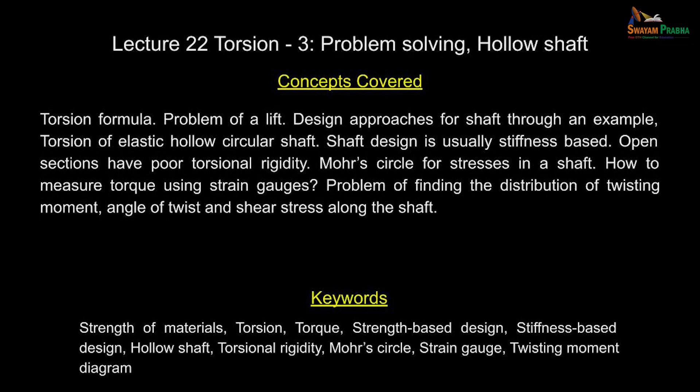Let us continue our discussion on torsion, and we shall solve some interesting problems today to get the idea of how to use the equations that are developed, and what are their limitations.

Now this is a very interesting practical problem. You have a lift system, you have a lift, there is also a counterweight. Periodically they will come and maintain the lift, and at that time it is possible for you to see what is the counterweight in the lift system. This is in an apartment. Those lifts are much smaller than what you have in our institute, or when you go to hospitals, they have a huge lift.

The question here is, if you get onto any one of these lifts, there will be a board that says how many persons can enter into the lift, and you have an electrical system. If the persons are more, it gives a buzzer, one person has to get out only, then the lift moves.

So at the design office, the person has to decide how the system stiffness is so that it meets all the requirements. Here the requirement is, when the lift is standing at one floor, that means everything is static, you can permit only a downward movement of 3 millimeters. So at the design office you have to find out what is the stiffness. Is there anything that you have to do with shaft design? All this you have to take care of, and based on this the designer also has to decide how many people can enter into the lift.

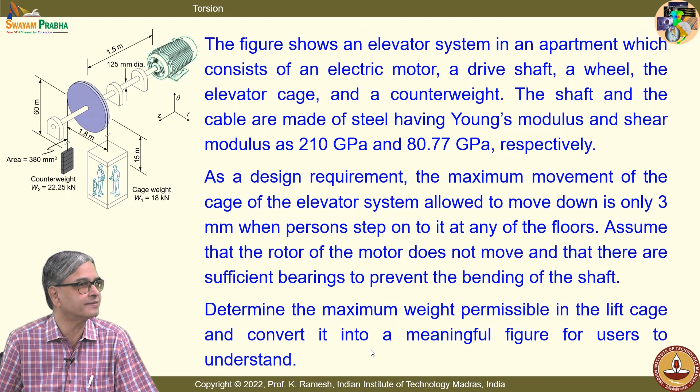So you have to have a pragmatic approach and then bring in some kind of factor of safety, and you have to do that.

One of the simple things that you can do first is look at the free body diagram of the cage, and you can also have the free body diagram of the counterweight. So what you have is a dead weight of the cage, that is put as W1.

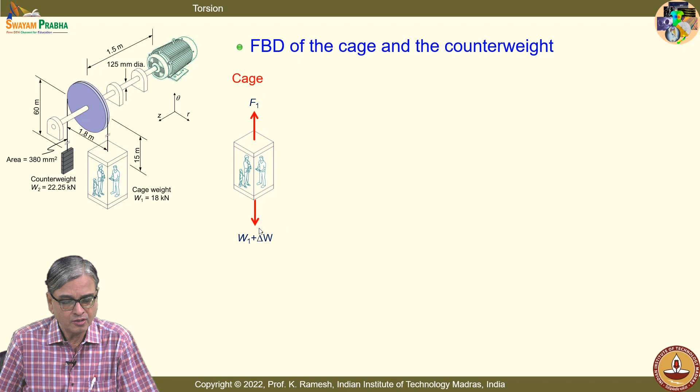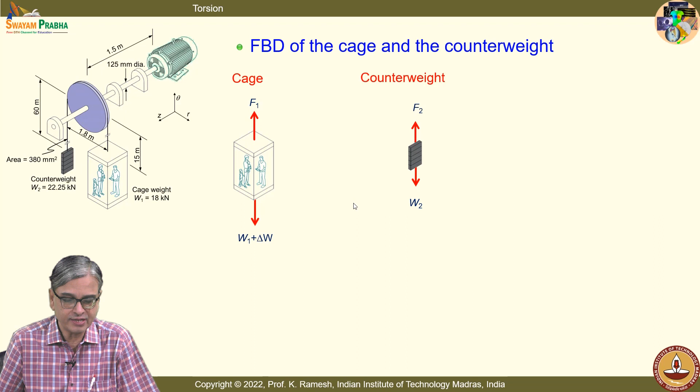Let us imagine that the lift was empty to start with, and some people have entered into this lift, that is delta W, or in other words, how many people it can accommodate is the question. So you have to put a label inside the lift, so many people can enter into the lift. This free body is simple, and you get the force balance as F1 equal to W1 plus delta W.

You are given the cage weight is 18 kilonewtons, and you have the counterweight as 22.25 kilonewtons. Now the question is...

What all aspects of the system will contribute to a downward movement of the cage? You must understand that the motor stopped, there is no rotation from the motor. So it is standing at a floor and people step into it.

And you know very well that we are discussing torsion, so something with torsion is going to happen, so that you will recognize. Because many times, when you solve a problem, if it is given in a particular chapter, you take advantage of that. In reality, if you are given a physical problem, you should know how to dissect and find out what contributes to it. Is the idea clear?

So what is the contribution from torque? Can you imagine? I have a shaft. This shaft is supported at 2 bearings on one side and 1 bearing on the other side, and you have a big pulley which is mounted on the shaft. You have a counterweight and you have the lift cage. So you can imagine, you are also given the length, this is about 1.5 meters.

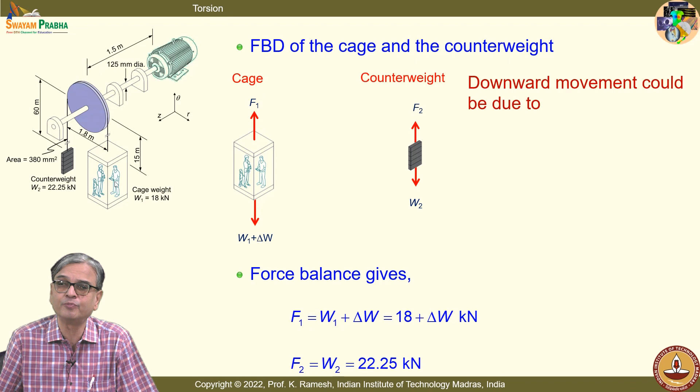So you are going to have this shaft. It is not a rigid body, it is deformable, so it develops a twist. Because of the cage weight there is a twist already, and because of some people entering into the lift there is a change in weight, change in torque, that contributes to angle of twist, which will get magnified by this big wheel, and you will see this as a vertical downward movement of the lift. So that is very clear. Angular twist of the shaft is very clear, that you can employ the equations and then find out what it is. What are the other aspects that can contribute to downward movement?

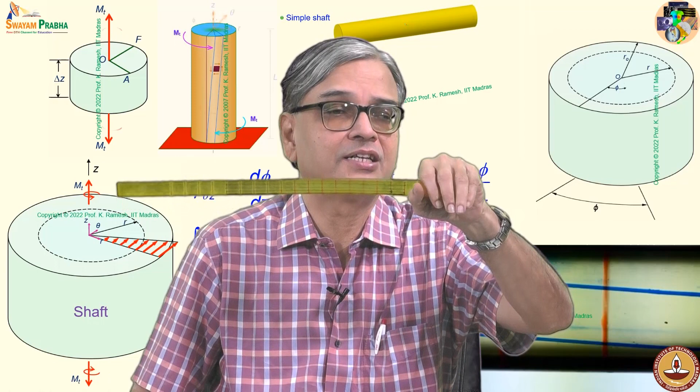Can you guess what are the other movements that can contribute? See, I am holding it on one side, what you find is it's sagging. So I put a support, I put one support, the sagging is very much limited.

And what is given in the problem? The problem says that I have 3 bearings, 1, 2 and 3. They are sufficiently close enough so that any deflection due to bending, you can ignore it. That is given in the problem.

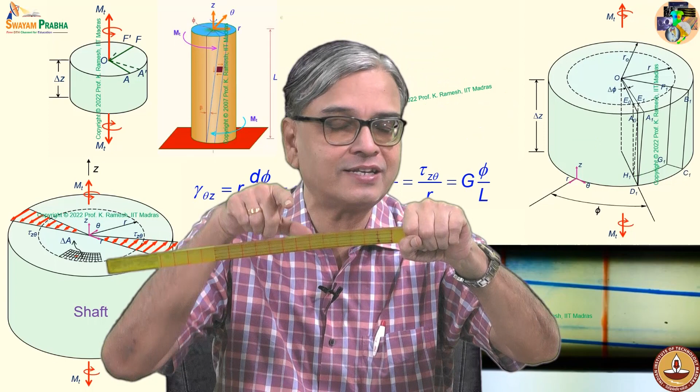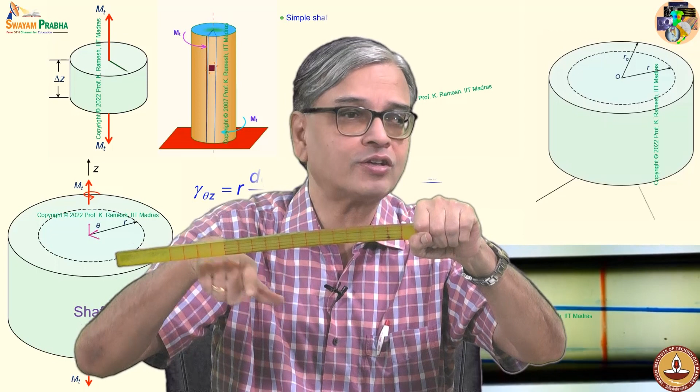There are 2 ways of looking at it. You don't have a background on bending, so you cannot calculate the deflection due to bending. When I put a support, the shaft remains horizontal, that's fine. But if I have an additional load which is very heavy, this is going to cause a deflection. You don't have that background. So for the time being, let us ignore, as given in the problem statement, the bending of the shaft, though it can contribute to vertical deflection, let us ignore it for this problem.

Is there anything else that can contribute to downward movement? Stretching of the wire, that's very good. I have a cable on this, so I have a stretch of this. That you may miss it.

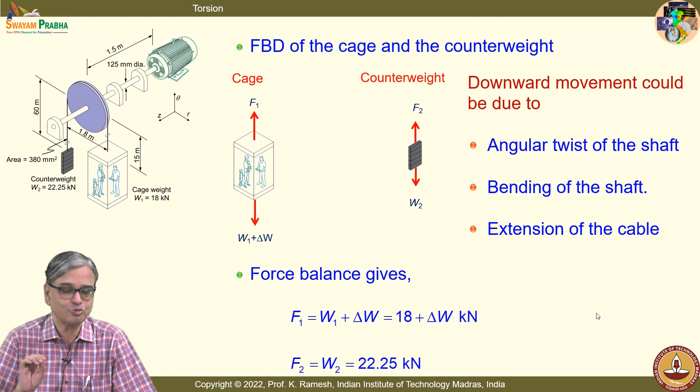Fine, so you also have extension of the cable. So we have to account in this problem only 2 aspects: angular twist of the shaft and extension of the cable. Once you have understood what is to be done, the rest of the problem is application of what you have learnt earlier. Simple and straightforward. Is the idea clear? I would like you to use your calculators and get me the numbers.

So increase of torque due to weight of people: I have delta W into radius of the pulley, and that's also given, you are given diameter as 1.8 meters. So I get this number here.

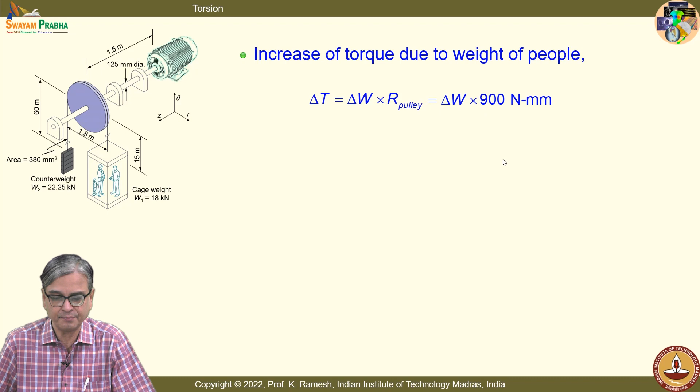And what is the increment in the angle of twist? I have delta T L by G IP, and you know what is the IP for a circular shaft. So I get this as pi by 32 into 125 power 4, and your G is given in the problem statement as 80.77 into 10 power 3. And I have delta W into 900 as the torque additionally developed, and the length is also expressed in millimeters. So I am in a position to get delta phi when I see from this, this is as a fixed end, and then it comes to this portion.

So I have extension due to torque increment. I will have to multiply this angle of twist by the radius of the pulley. So it gets magnified because of the diameter of the pulley. We have taken the radius, from the diameter get the radius, and you get the extension or downward movement due to torque as 0.627 into 10 power minus 3 delta W millimeter.

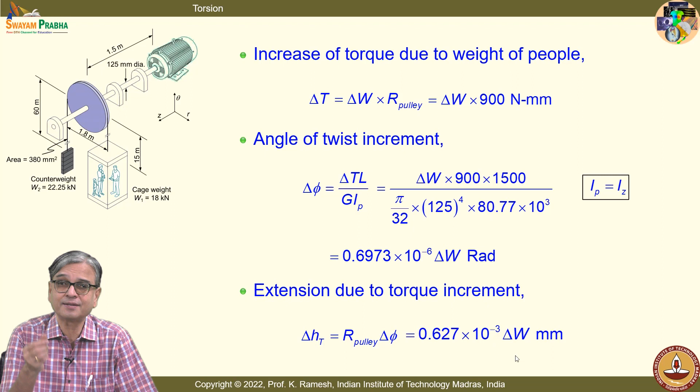We still do not know what is delta W. A problem becomes a design problem when limits are given to you. This is a design problem because limits are given. You are given that the maximum downward movement permitted is only 3 millimeters. How you arrive at it, that is a big question. It's not like somebody has a dream and then says 3 millimeter. There are physical considerations, so you have to look at that, that is a difficult aspect of it, how to set limits for you to do the design.

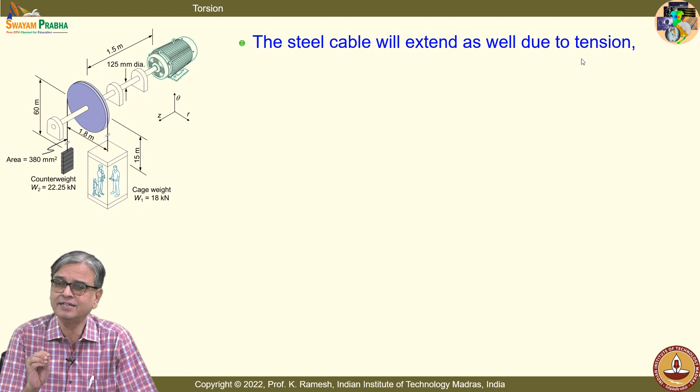And a steel cable will extend as well due to tension. And you know, for axial load, a very famous expression we have got. Do you remember? In terms of applied load P, the extension is given as, these are all very famous expressions you should remember, PL by AE. Don't forget that. Now replace what is P, what is L, what is area of cross section, and what is Young's modulus. We are talking about delta W as the additional load because of number of people who step into the lift, so this is P, so PL by AE.

So I have this number substituted. I have this area of cross section of the cable, the dimensions are given, so you have to look at that. Area is given as 380 millimeters squared. You do not have to do the calculation yourself, it is given in the problem statement, and Young's modulus is given. So this gives me, when I substitute the numbers, I get this as 0.188 into 10 power minus 3 delta W. And it is given in the problem statement that this extension should be limited to 3 millimeters.

So you can easily find out what is the delta W acceptable. It's child's play, just substitute these numbers and equate it, and when you get the delta W, it comes to be something like 3678.36 newtons. See, engineers look at things from a physical perspective. So this amounts to how many people?

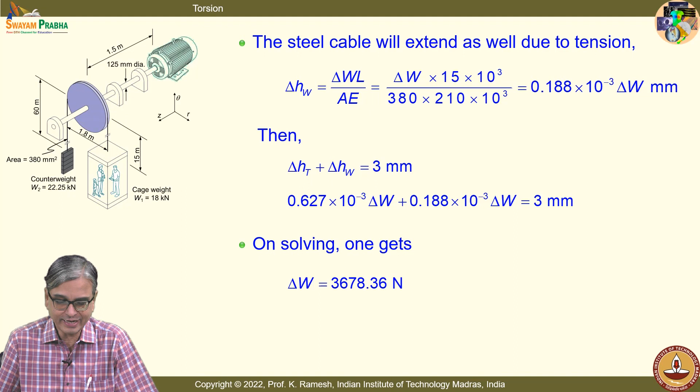Suppose you have 70 to 75 as the weight of the person, you can imagine it can accommodate about 5 people. You are a designer, you want to have some kind of factor of safety inbuilt. So even though I can allow 5 people to step on it, in a conservative design, permit only 4 persons.

So put a label: this lift, beyond 4 persons, do not get onto it. This is one way of learning. While you design, you take care of anything that you have not calculated or included, any manufacturing defect, any problem in the cable, all that you inbuilt by bringing some kind of factor of safety.

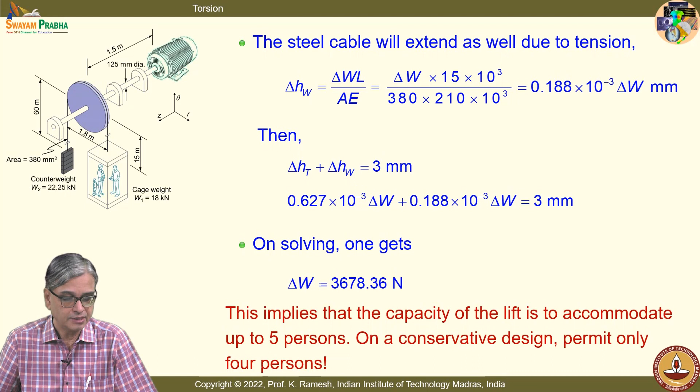See, the cable, what you have here is not a simple rod of wire. You will have multiple strands twisted, and factor of safety for a cable design is altogether different. You will have factor of safety of the order of 10, because any small problem there can be disastrous.

That is what is needed when you have a cable car, not in the lift, but in the cable car you have exposure to natural elements and also high wind. You must have seen in the papers that people got stuck in a cable car and the army helicopter goes and rescues them, all that happens.

So factor of safety is a very, very important concept. You have to apply it depending on the context. For a car design, it was initially 4, now they have brought it down to very close to 2 or less than 2. But when you go for a cable design, the factor of safety is very high, a factor of 10.

When you are designing a nuclear power plant, factor of safety will be very high. You do not want to take chances, because nuclear radiation deteriorates the material. So there are many considerations that go into it.

So a problem becomes a problem of design when limits are set. How to select the limits? That is a very big job to be done. Once you set the limits, you know how to use the equations and get the calculations.

Now we move on to the next simple but interesting problem. Consider a steel shaft - I have deliberately taken simple problems. The focus is to learn the use of equations and also appreciate what happens when I do a design from one perspective. Here the shaft can withstand a maximum stress of 60 MPa. There is also another requirement that the maximum angular twist permitted is only 1.25 degrees. The question is, evaluate the shaft diameter based on strength and based on stiffness.

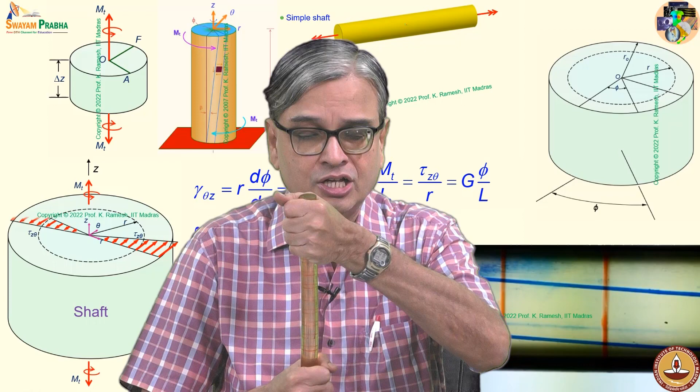See, what I want to do is, while you solve this problem, let me also circulate this so that you can have a feel of what happens in the case of a shaft. You twist it yourself and then see what happens. Can you correct it and then let this be circulated?

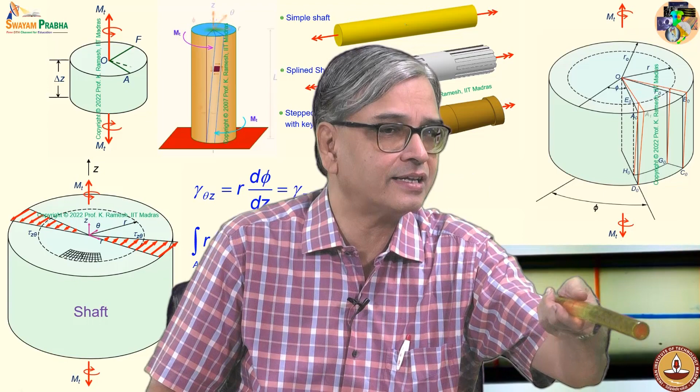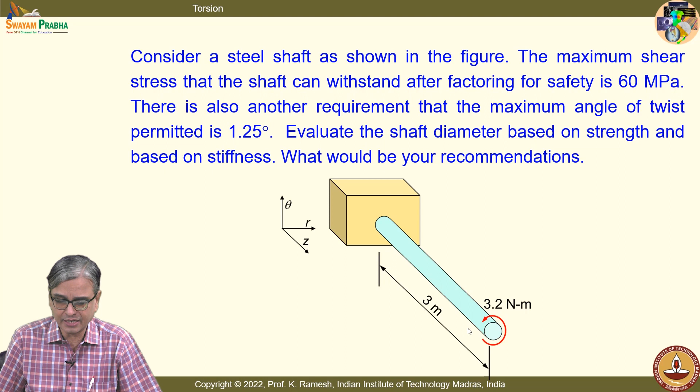So the problem is simple, straightforward. There are no steps in the shaft. It's a simple cylindrical member, and the twisting moment is given.

And you should also understand, we have taken the axis of the shaft as the z direction because it is a circular shaft. We have taken polar coordinates to define the circular boundary, and you should appreciate that the twisting moment is nothing but Mz, and the moment of inertia we want to calculate is actually the polar moment of inertia, because when you go to bending, there you will again see Iz, but that will be a different moment of inertia. In order to avoid confusion, I thought we would adopt this symbolism.

So I have this maximum shear stress introduced from our torsion formula. You can have this as Mt R divided by Ip, and the stresses are maximum at the outer diameter, so R max is d by 2, and Ip is pi d power 4 divided by 32. So the shear stress maximum in a cylindrical shaft is 16 Mt by pi d cube.

In fact, this expression is also worth remembering when you go for design calculations, design of a circular shaft, because when you have a shaft, it is subjected to torsion, it is subjected to bending, it can also have axial force. So once you learn bending, you must also get the stresses because of bending.

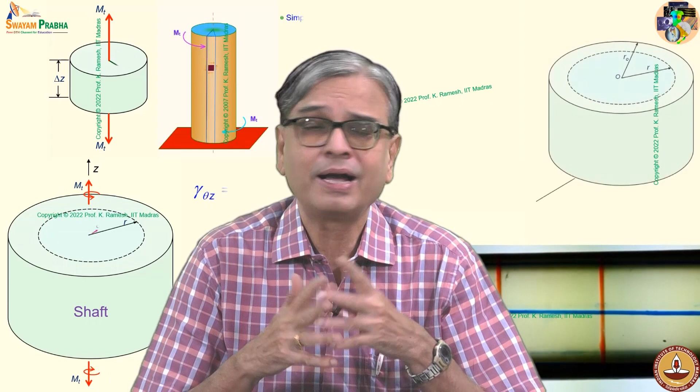And it is given the maximum shear stress is 60 MPa. I would like you to appreciate, you have looked at mild steel, the yield strength was something like 240 MPa. And I said that you will never go to yielding in a real life structure, you will work much below that. So I work half of it, that is 120 MPa.

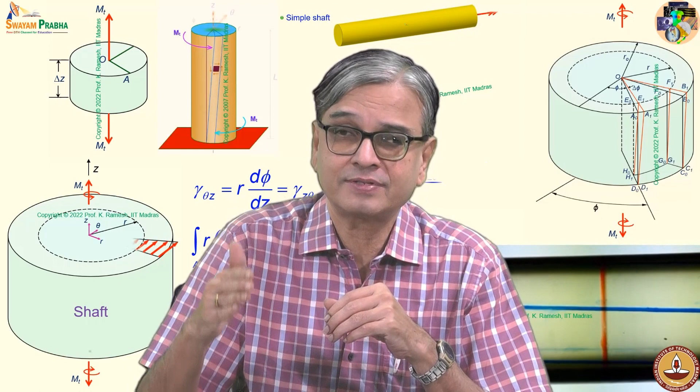Then I said that you have repeated loading. In the case of a problem which I have shown, there is no torsional oscillation. On the other hand, if you go to an IC engine, you also have torsional oscillation. So there the torsion is going to change as a function of time. Suppose I want to bring in, when the shaft is rotating, because of rotation, the bending stresses will oscillate.

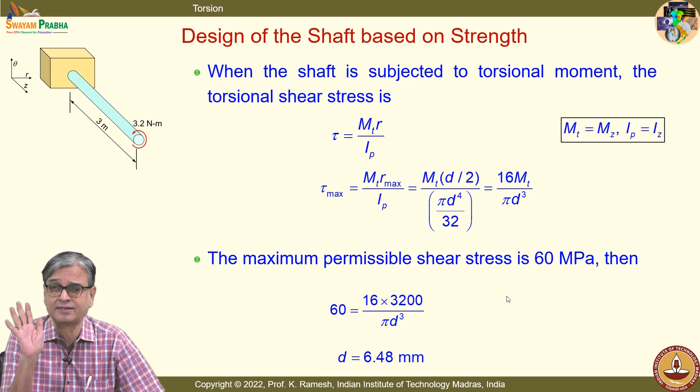Suppose from that consideration, I would like to have the maximum stress limited as 60 MPa, that is 1/4 of the yield strength of even the mild steel. Mild steel has very low yield strength. Alloy steel is about 550 or so. So even the cheapest material, we don't want to load it.

And when I do the calculation, what is the diameter that you get? Is it a shaft or a rod? It is no longer behaving like a shaft, it's like a very thin rod. And naturally, you would expect that this is going to have a very large value of angle of twist.

Is the idea clear? I have taken to start with 1/4 of the yield strength. I have not applied very close to the yield strength, very, very small stress I have taken. Even when I take a small stress like this, I get a number which is very funny. D is 6.48 millimeter. I want you to calculate the angle of twist for this.

Do the calculation. And in the meanwhile, let me also go and proceed. We have also said the angle of twist should be limited to 1.25 degrees. That's given in the problem statement. And I have the expression for this as MTL by GIP.

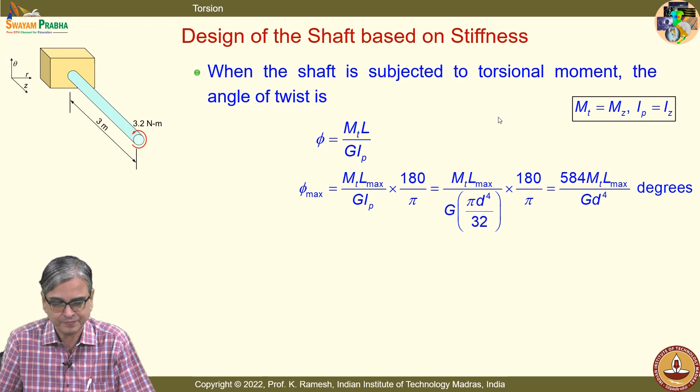I have already said GIP is the torsional rigidity. So when you solve problems in future, calculate this GIP and keep it at one place so that you can repeatedly use it for various purposes. And the angle of twist will be maximum when L is maximum, that is at the free end.

So I get this, when I substitute these numbers, as 584 Mt into L max divided by G d power 4 degrees. I have already told you in the development of the equations, phi was in radians. Never forget that. It was in radians. What you get from this basic expression is in radians. I convert the radians into degrees using 180 divided by pi. So I get this in degrees.

So when I limit the angle of twist to 1.25 degrees, I get a reasonable size of the shaft, which is 15.35 millimeters. It is something better than 6 millimeter.

Fine. So now we have to do two calculations. One calculation is, when I take a diameter of 15.35, what is the maximum stress generated? Even before calculation, can you tell me which will be more or less?

When I have a shaft whose diameter is increased, we have earlier calculated the diameter is only 6 millimeter if the limiting stress is 60 MPa. Now I have increased the diameter, almost double the size. It was about 6 millimeter, this is about 15 millimeters, slightly more than double. Do you expect the stress developed is more or less? Why do you say it is less?

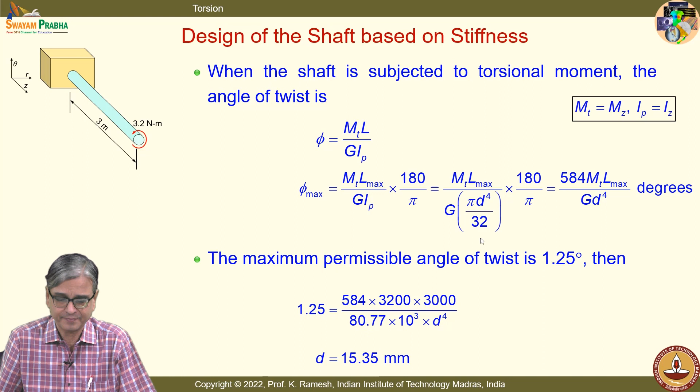Fine. Suppose I also put another restriction, even 1.25 degrees is not acceptable. I want to bring home a point. Whenever we want to understand anything, we want to have very large deformation.

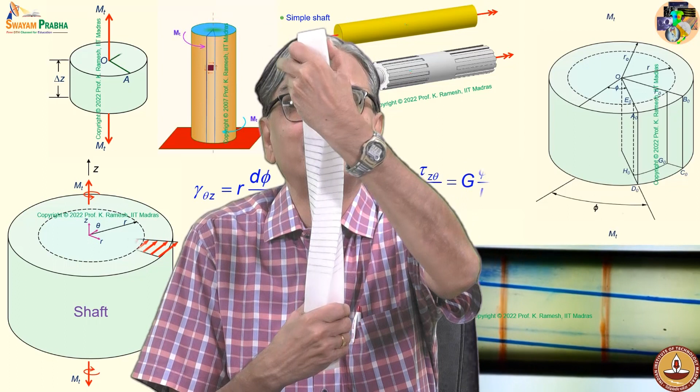I can do this only if I have a very large deformation, almost close to one circle, about 360 degrees. Only then I am in a position to show that these horizontal lines have a warping. For you to visualize, you need large deformation, but mathematics will not work, it is not applicable when I have large deformation. Just to drive home this point, I have said the permissible twist is only 0.5 degrees. In reality, you will have only such small angle of twist.

In all our discussion, in order to drive home what kind of deformations take place in torsion, I deliberately show a large deformation for you to visualize the interrelationship and what happens. But in reality, these angles are very, very small and our equations are applicable only when you have small deformation. Never forget that. And I find the diameter has slightly increased, 19.3 millimeter.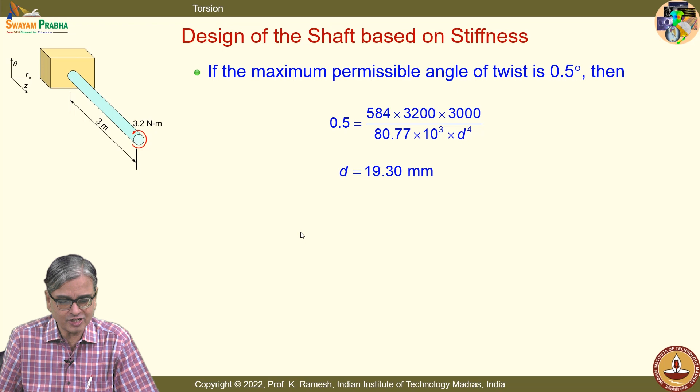Before we discuss the problem further, I want to also discuss what happens when I have a hollow circular shaft. It's very, very important. The same equations are applicable. So you make a concentric hole and I have only a shaft which is like this. I have also brought this.

So you have a tube, with a particular thickness for this. You can see this, and it is also very strong. When I twist it, I am finding it very difficult to twist. It is made of plastic only.

Whereas the other one which I have circulated is made of soft material, solid. This is also solid, this is also plastic. But when I have it in the form of a tube, it gives an impression that it is very strong. Don't you feel so? Let us see what the mathematics say.

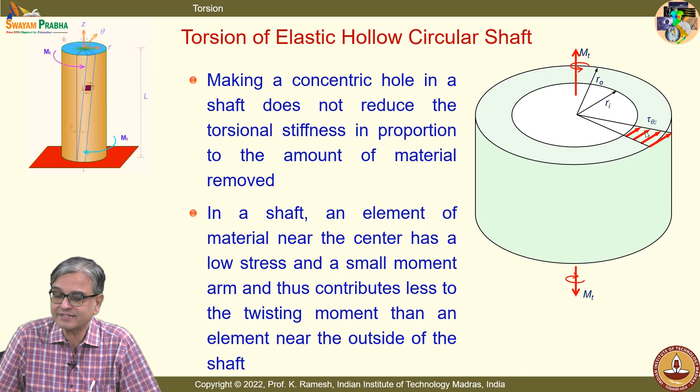This is also applicable. Instead of this going to zero, it stops at whatever shear stress that this radius can develop. And the difference is coming in the moment of inertia.

I told you among the various mathematical quantities, which one recognizes the cross section. You must appreciate when you change the cross section, moment of inertia changes. And you all know, if I have the axis like this, suppose I have a smaller tube like this, I have a bigger tube like this, moment of inertia is going to be higher because the material is put away from the center. The farther away from the center axis, you get higher and higher values of moment of inertia. So the moment of inertia calculation will be different.

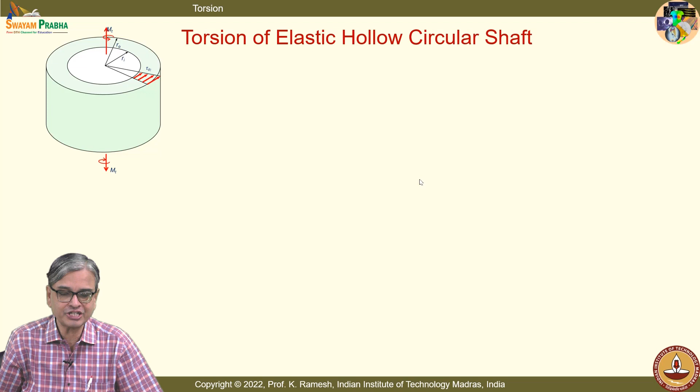The equations that you have derived are valid, and Iz or Ip is now pi d naught power 4 divided by 32, multiplied by 1 minus di by d naught whole power 4.

And also in your design, people may specify what should be the ratio of di by d naught. That makes your calculation simple. When you take a hollow shaft, you try to make the diameter a little more so that you use less material and higher inertia, because you have to satisfy the stress levels as well as the twisting requirement.

Both are necessary. So now we will go back to the same problem and calculate what should be the dimensions of a hollow shaft to support the same load. That will give you clarity whether a solid shaft is better or a hollow shaft is better.

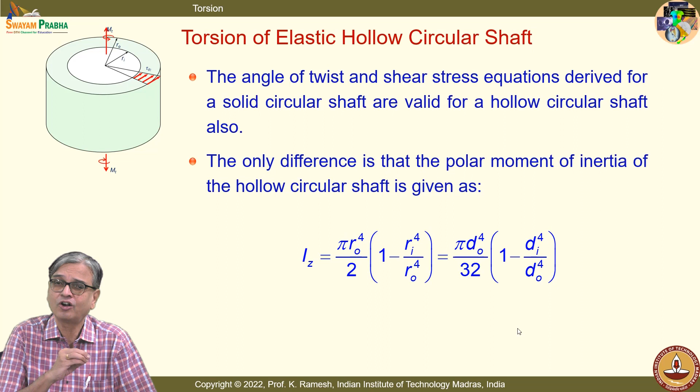Is the idea clear? See, the area of cross section is given right here. We will also calculate, and you have to remember that we have limited the angle of twist as 0.5 degrees and we got the diameter as 19.3.

And you are also given another simplification: take the value of di by d naught as 0.6. That is given in the problem statement, because I can construct multiple hollow shafts even if I want to match the same area of cross section.

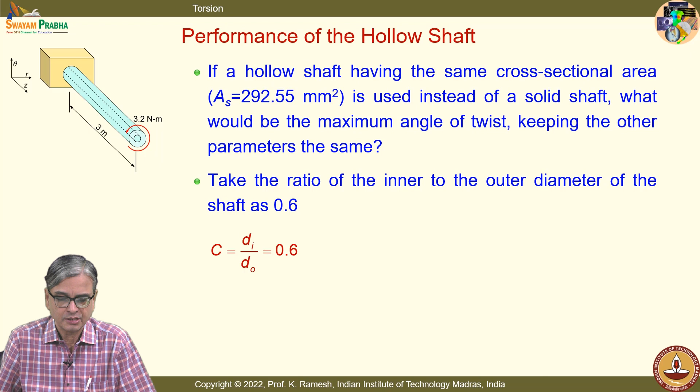So what you have is the area of cross section of the solid shaft. I have again calculated it so that you really associate the results to this problem. I have limited the angle of twist to only 0.5 degrees, and I have got the result as 19.3 as a diameter. So I calculate the area of cross section. The comparison would be valid. I use the same material to construct a hollow shaft.

When C is also given, if you do the calculations, you can find that the outer diameter should be 24.125 millimeters and the inner diameter 14.475 millimeters. So the wall thickness is something like 5 millimeters.

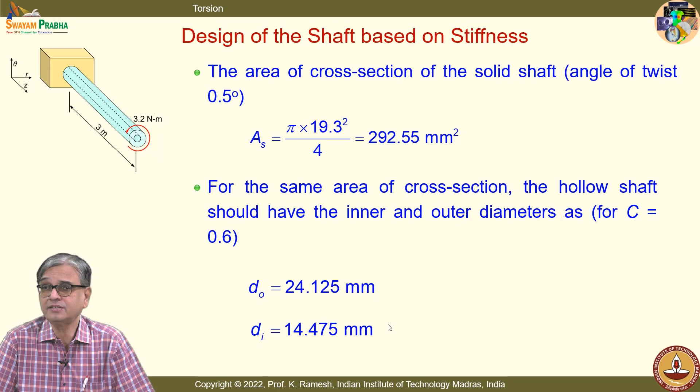You know why I mentioned the wall thickness? Because you want to have a higher value of moment of inertia, you increase the outer diameter and keep reducing your wall thickness. You can also do that, isn't it?

Why am I talking about wall thickness? Can you guess where do you anticipate a problem? I am going to take the shaft and twist it.

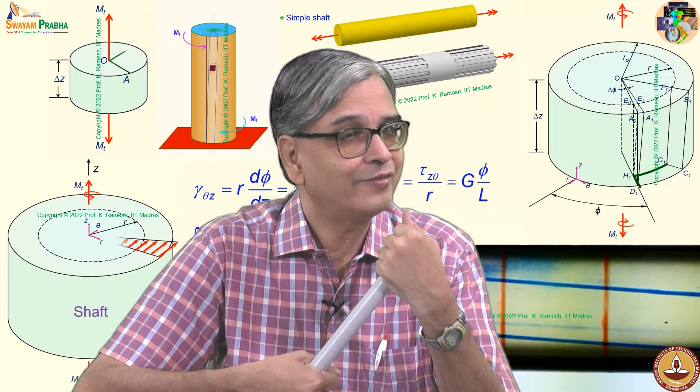When I twist, what is the kind of state of stress there? Shear can be viewed as what? At 45 degrees, what do you see shear as? Tension and compression.

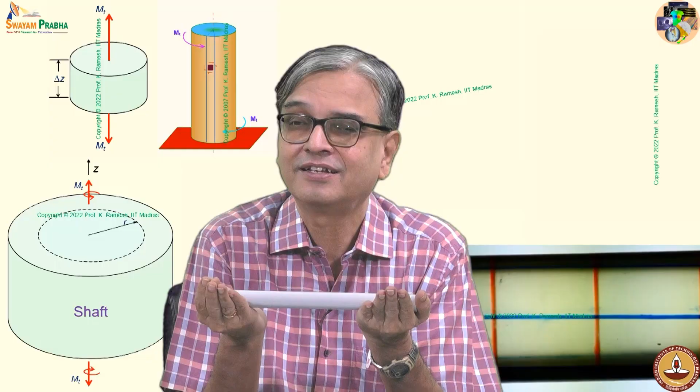So compression is going to give me a problem. When you have a thinner and thinner section, and a compressive load, it can buckle. I can have torsion buckling. So you need to have a trade-off.

If I increase the outer diameter, my moment of inertia is going to increase. But if I keep reducing the thickness, I may reach the other extreme. When the twisting moment is transmitted, the shaft may develop buckling because of twisting.

People normally forget this at the end of the course, because we develop the critical load when you have compression on member columns, so they think only columns buckle. I have discussed it even in my initial lectures: buckling can happen whenever you have a compressive load.

Torsion also develops compressive load at some other planes. You should never forget that.

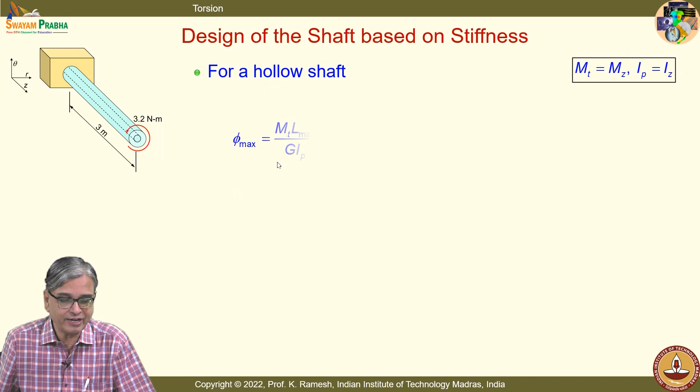So I go and calculate what is the angle of twist for this shaft, and when I substitute all these quantities, only the inertia changes here. So you can take the same expression, change the inertia, and substitute these values.

You find that for the same cross section as the solid shaft, if I use a hollow shaft with C equal to 0.6, as specified in your problem, the angle of twist is just half of it. That means the solid shaft is weaker in comparison to a hollow shaft for the same cross section.

So what does this imply? I can also satisfy my design requirement by having smaller material than a solid shaft, so that I can save material. Is the idea clear?

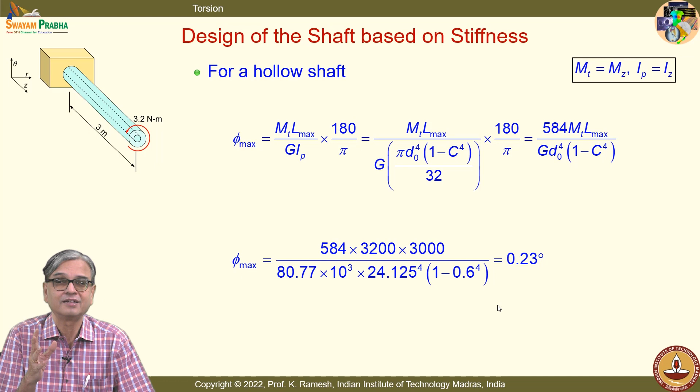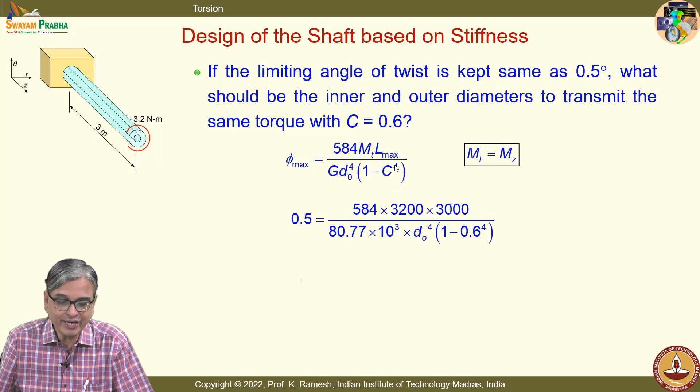Okay, and we will also do the calculation. If the limiting angle of twist is 0.5 degrees, I don't want to change it. Now I want to find out what should be my outer diameter and inner diameter.

The outer diameter and inner diameter are calculated, and you find outer diameter is 19.98, slightly greater than what was there earlier, and inner diameter is 11.99 millimeter, and the difference is about 8 millimeters, considerably thick. It's not a very thin shaft.

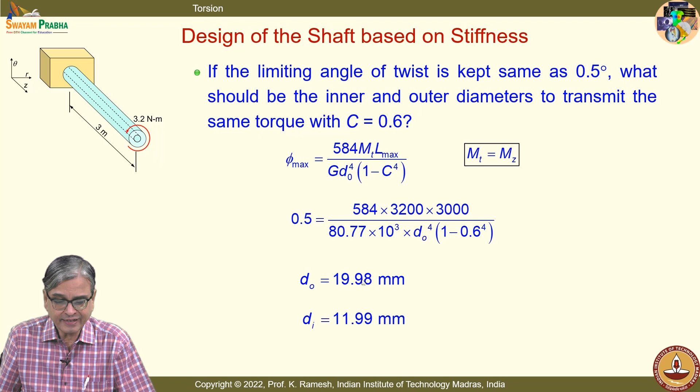So if I want to maintain my angle of twist at 0.5 degrees, it is enough that I use d0 and di like this. You can also calculate the area, find out what is the change in the cross sectional area, and if you have the length, you can also say what is the change in weight.

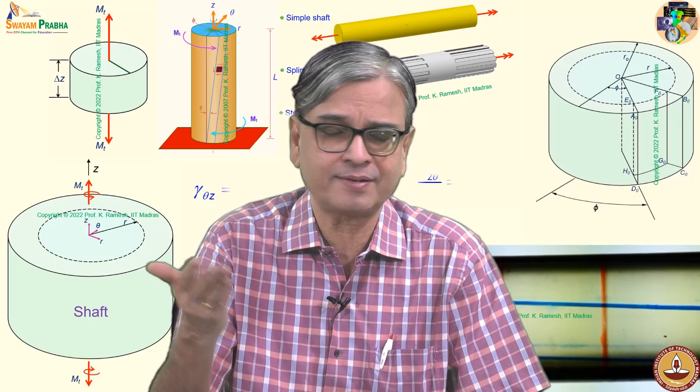Suppose you have a design requirement where weight is a consideration. If you look at the LCA aircraft, their weight is a very important consideration. When you have a power drive shaft, that's all hollow in an aircraft, because every kilogram you save, you save an enormous amount of fuel over its complete life.

But you go to an Atta Chakki, you find only a solid shaft. Am I right? Why do people use a solid shaft when you find that a hollow shaft is better? It uses less material.

You have to look at it holistically. I have to remove material, I have to pay money to get the material removed. You understand? And it should also be concentric.

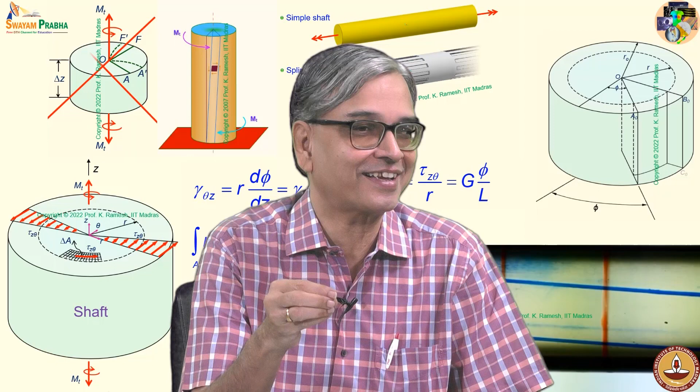So if you look at the manufacturing cost, in many design applications, day-to-day applications, there is no great advantage in using a hollow shaft, and also no great advantage in going for an alloy steel. It is enough to work with mild steel.

Isn't it? Because when you see everywhere, you don't normally come across a hollow shaft. Am I right? In many of the applications you have access to, you find everywhere the shaft is solid, whereas your mathematics now say a hollow shaft is better, since it uses less material.

That is one way of interpretation. The other way is that to get it hollow, you have to pay a cost. So you have to have a trade-off. And that cost advantage is necessary when I want to go for an aircraft design, where it's going to save an enormous amount of fuel.

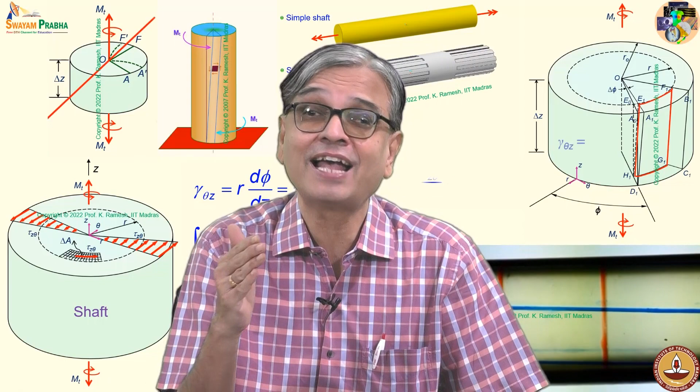So you are also learning strength of materials and getting insights on aspects of design. That's what you'll do in the next course. I have two design approaches we've looked at: one is strength based, another is stiffness based. In the strength based approach, we say what is the permitted shear stress, and I said we have not taken the 60 MPa arbitrarily - it's just 1/4 of the yield strength, very, very small. You're not permitting a very high level of stress. When I do this, I get the shaft diameter as 6.48, which is ridiculous.

I've asked you to calculate the angle of twist. Has anybody calculated the angle of twist for this diameter? Please do the calculation and verify with my table, because my table also has the final shear stress developed and the phi max. I want you to do the calculation using a calculator.

We have also analyzed the same problem based on stiffness. You know the expression for stiffness as phi max equals MTL by GIP. I said you have to calculate GIP and keep it aside for your calculations - it's the torsional rigidity. I've also given an expression for tau max, 16 MT by... what is the value? This is a very important expression that you have to remember.

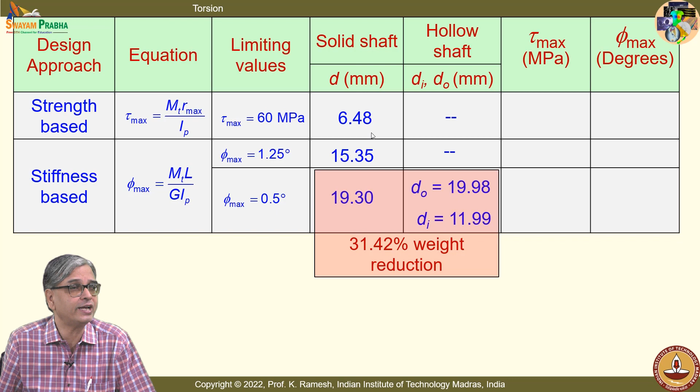Has anybody calculated the angle of twist for this shaft of diameter 6.48? Anybody have the number? You're not doing the calculation - you should do it and then check, because you should also pick up speed. It's only one simple expression you have to calculate, because you should also know what happens to the angle of twist.

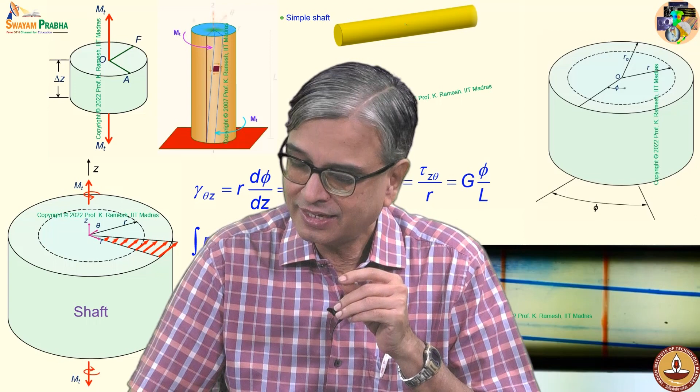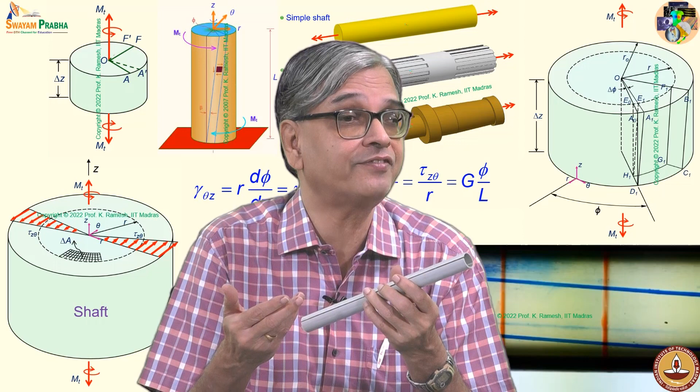In the meanwhile, while you calculate, let me ask one more question. I've shown a circular shaft, and we find that a hollow shaft is very, very strong. Is the idea clear? Now what I do is go and make a thin cut here, a small slit. What do you think will happen? What will be its torsional rigidity? Because we've seen, compared to a solid shaft, a hollow shaft is very, very strong, isn't it?

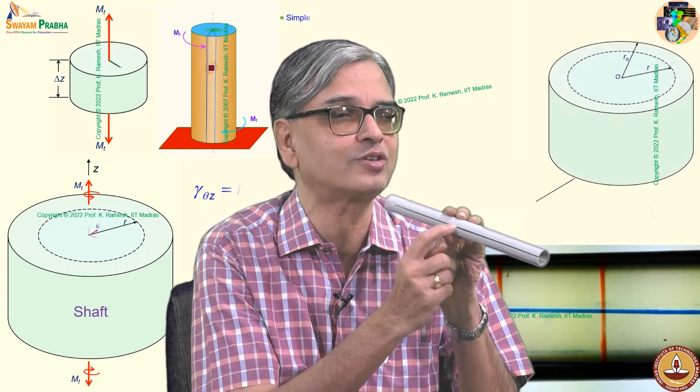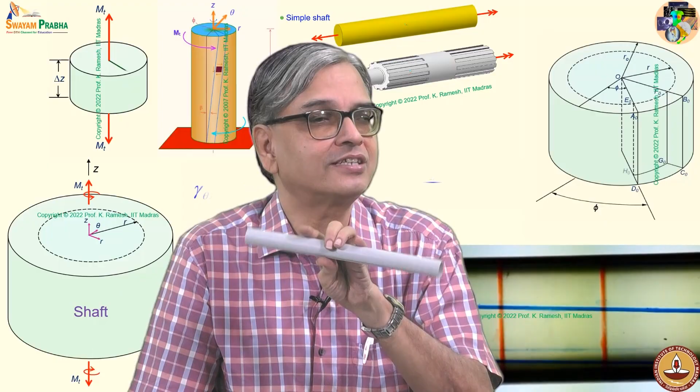Now what I've done is asked him to make this thinner, but he didn't have a cutter, so he made it as a slit instead. What is your take on it - what will happen to the torsional rigidity? It won't change - it's like a mathematician's view: you have an infinite plate with a small hole equivalent to a plate without a hole. I'm happy you gave that answer.

Let me twist it and show you - I'm not a very strong man, okay? Let me twist and show you what is happening. What is it that you're seeing in reality? It's drastically reduced. Do you get the feel of it? It is drastically reduced. So technically, these are called open sections.

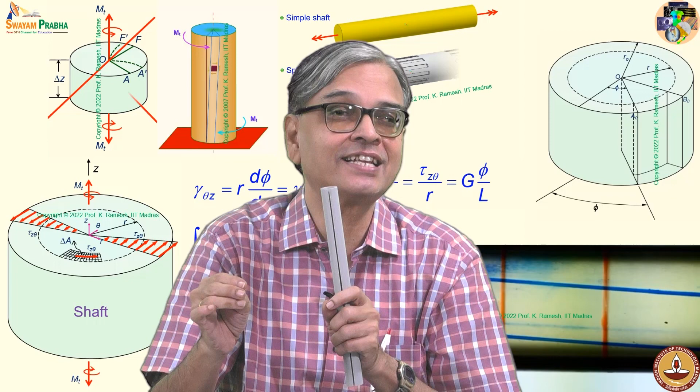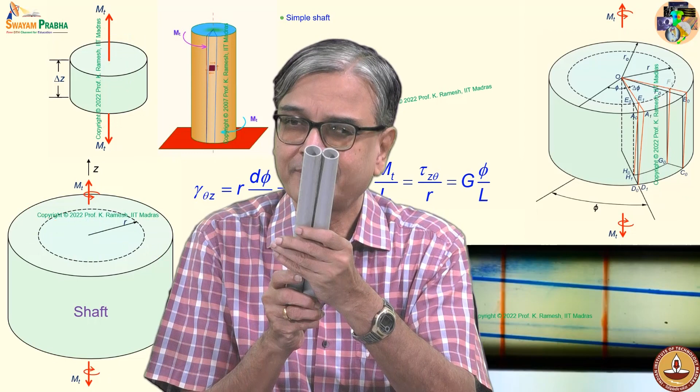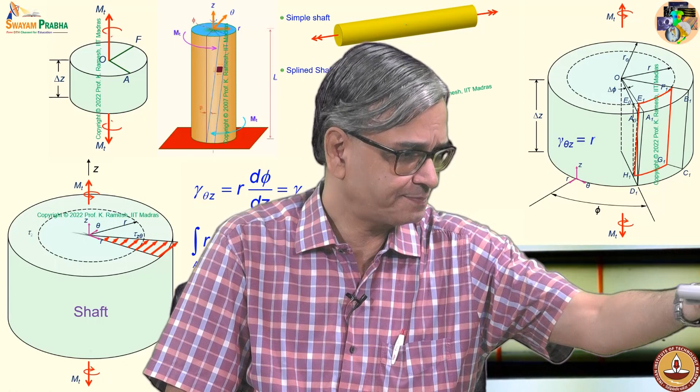So write this down: open sections have poor torsional rigidity. I'm also going to circulate this so you have a feel of it - I'm circulating a hollow shaft as well as a shaft where I've removed this material. So you have hollow shafts, one with a slit. Twist both of them and feel it - feeling is very important. If I have an open section, even with a small slit, even smaller than this, the width being smaller also will behave in the same way. So open sections have very poor torsional rigidity. Can I get the number for this table?

I have discussed all this. In the meanwhile, somebody will calculate. Okay, the value comes to be 39.41 degrees - a very, very high angle of twist. Unacceptable. You can't have a shaft supported on bearings when you have such large twist.

In the problem of the lift also, it will not stop at 3 millimeter. It will go to the next floor.

Okay, and when I go to 1.25 degrees, look at what are the stresses developed. You guessed correctly that it is proportional to d cube, so you said it is going to be smaller. So it is just 4.51 MPa.

And when I go to 0.5 degrees, when I increase the diameter, for a solid shaft it goes to 2.27 MPa. For a hollow shaft it goes to 2.35 MPa.

Let me ask a question. Suppose you have to design a shaft out of these two approaches, which approach would you adopt? Stiffness approach - that's very, very important. That's a learning in this class. So when you want to design a shaft, designs are usually stiffness based. It's never strength based. On the other hand, if I go and design a spring, it is always strength based.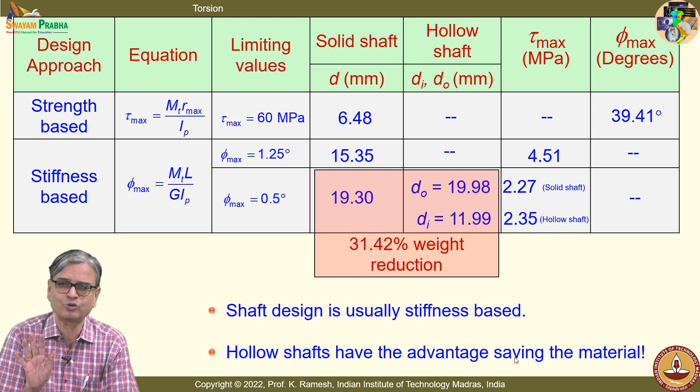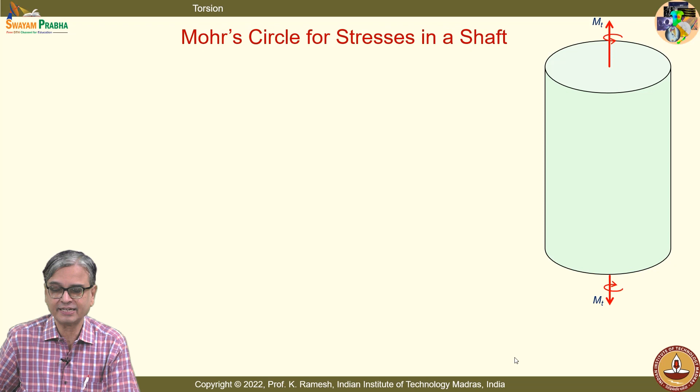And we have already seen Mohr circle several times for the pure shear stress state, and you should recognize that torsion is a situation where I have a pure shear stress state, and I have the principal stress direction in the shaft at 45 degrees.

So this is shown in a different purpose - it is kept in a vertical direction, and this is drawn. Can you draw the element at 45 degrees and show tension and compression just below, and check with my diagram? See, you should also apply your mind while learning. Keep applying your mind and then find out what is happening.

So I have the shear stress indicated like this. Tell me where I will have tension, where I will have compression. Just below this, draw the element which is at 45 degrees. Tell me which is the direction where you have tension, which is the direction where you have compression. When you draw the Mohr circle, you can easily locate it. But even without the Mohr circle, the moment you see the stresses here, you should be able to do that. These are all training - you understand the concepts better, and then you find out how to get this.

So I have this as tension and this as compression, which you can also verify from the Mohr circle.

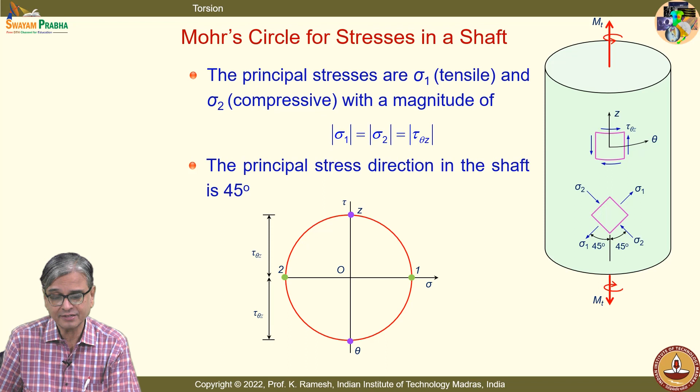And we have also seen how to paste strain gauges, am I right? How to paste strain gauges. Let me go back to that, because you know these are the things that engineers have to do this repeatedly. You also have an experiment in your strength of materials lab where you find out the torque using strain gauges.

So you have the stress state drawn for you to visualize very clearly, and this is what we had seen when we developed strain gauges for measurement of strain. We have looked at the problem like this - it is twisted anti-clockwise.

And then when you draw the side view, the strain gauges are connected like this, pasted like this at 45 degrees. Why 45 degrees? You have the reason - strain gauge can measure only the axial strain, it cannot measure shear strain.

So you measure the tension and compression, and you should also recognize what is the way for this I am drawing, for this picture I am drawing. Okay, don't confuse this with this. This is drawn vertical, this is drawn horizontal.

For this I am drawing the shear, and you also know that epsilon 1 and epsilon 3 are positive, epsilon 2 and epsilon 4 are negative. You should also connect them appropriately in the Wheatstone bridge. So they are connected like this - I have 1, 2, 3, 4. So when the adjacent arms, because of opposite signs, they add up. Opposite arms like strains, they add up.

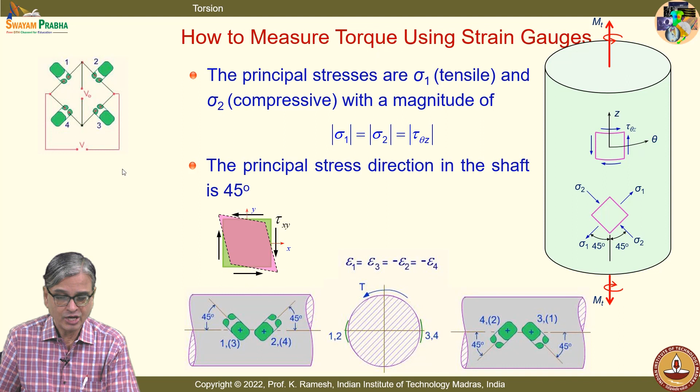So I get 4 times the signal. When you want to use a strain gauge as a torque sensor, you want to maximize the signal. So you use a Wheatstone bridge with all 4 arms of the bridge, and you use the knowledge of the stress state introduced in torsion in making the measurement. Is the idea clear? This is also a review for your strain gauges. You should take it. I consciously repeat concepts - the same concept in more than one lecture - so that your assimilation should be better.

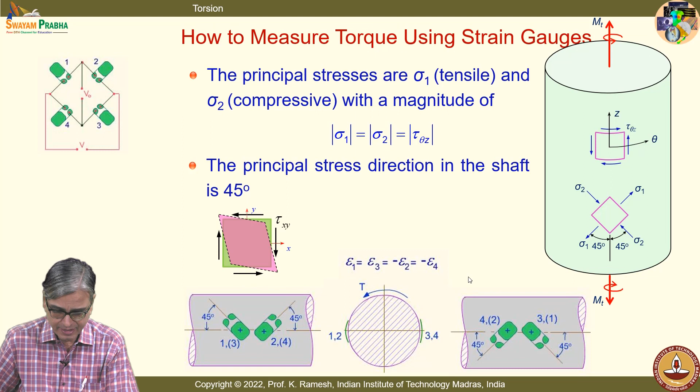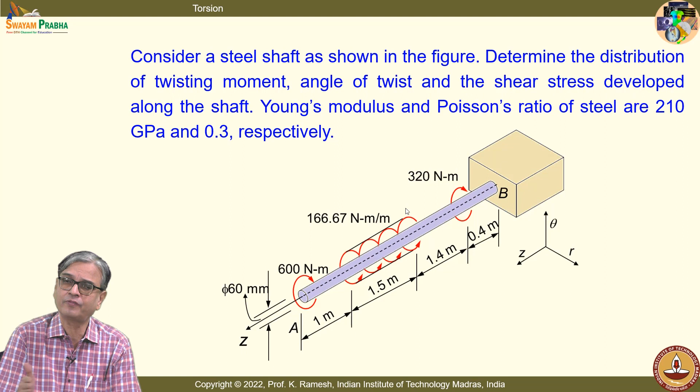Now we will also look at the problem we had taken up earlier. We have already determined the variation of twisting moment. For the same problem, calculate the angle of twist as well as the shear stress. We will see some of it in class; the rest I want you to solve as part of your home assignment.

We have already looked at the twisting moment. I am just going to show this so that we have these numbers to calculate. If I want to calculate the angle of twist, I need to know the twisting moment at that cross section, so I am going to show one after another what is happening. This you already have in your notes. For the purpose of this problem, when you want to find the twist, I need this.

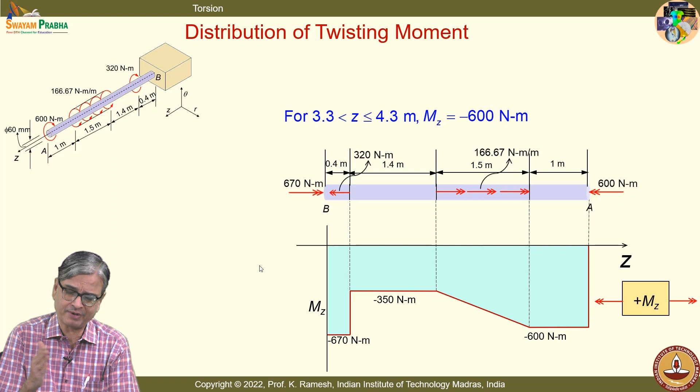The two calculations are angle of twist and shear stress, but for angle of twist you have to track what is happening along the length. We will take up angle of twist first.

Make it clear - I can also have two materials, like composite cylinders, where strain will be equated but stress will differ. All these concepts are identical across a variety of problems.

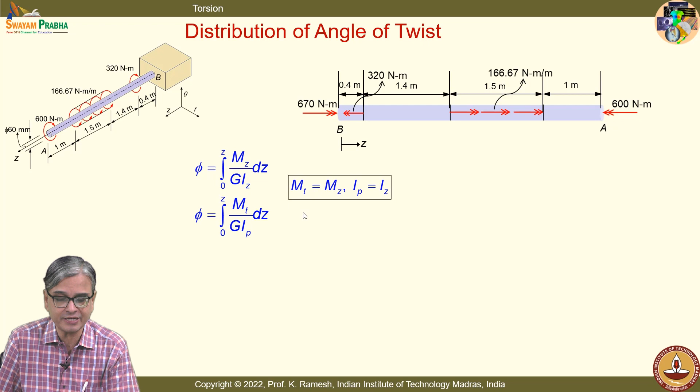So while writing this expression, with their axis reference, MT equals MZ and IP equals IZ. I will use this for doing the calculation, and I also said you calculate torsional rigidity and keep it, because in this problem the entire cross section is the same - there is no change in cross section, only the twisting moment changes. So once I calculate this, I can use it for all other sections.

If I use it for the first section, it is 0 to 0.4 meters. I have the twisting moment as minus 670 Newton meters. When I substitute this, I get it simply as minus 0.3735 Z, which is similar to what you have done.

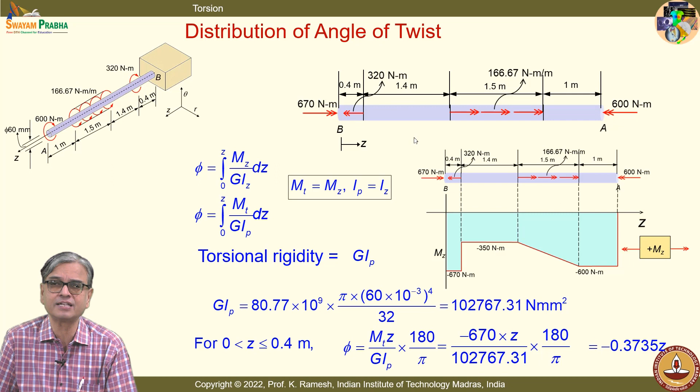Now I have to move from this section to the next section. I will just indicate what is the catch here and stop at that. So here I should have the angle of twist at this end and then bring in what is due to the next one. So I have Z is here, and then I start from this, it is 0.4 to 1.8. That is why I have a factor Z minus 0.4 coming in here. Then I calculate this.

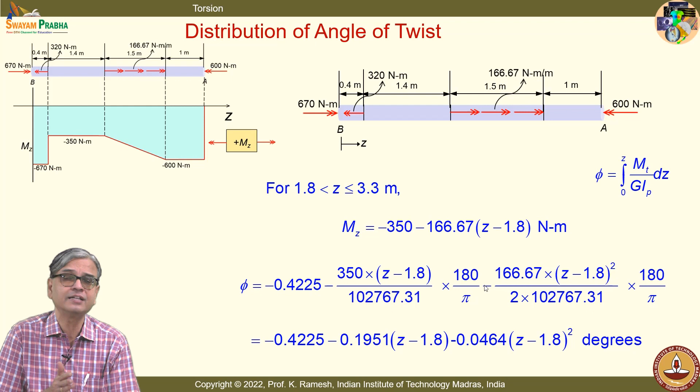And when I go to the next one, what I will have to do is the integration of this. I will just show that and stop for this class. So you know the expression for MZ, so I write the initial angle of twist. Then this I have to integrate - I have to do the integration. All along you have not done any integration, but because the moment is varying, you have to bring in the integration here.